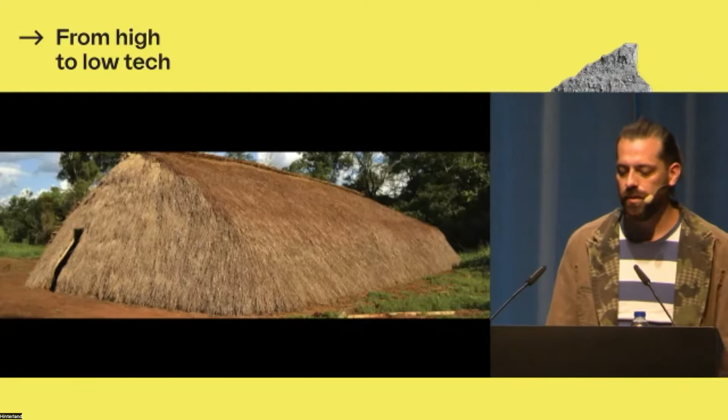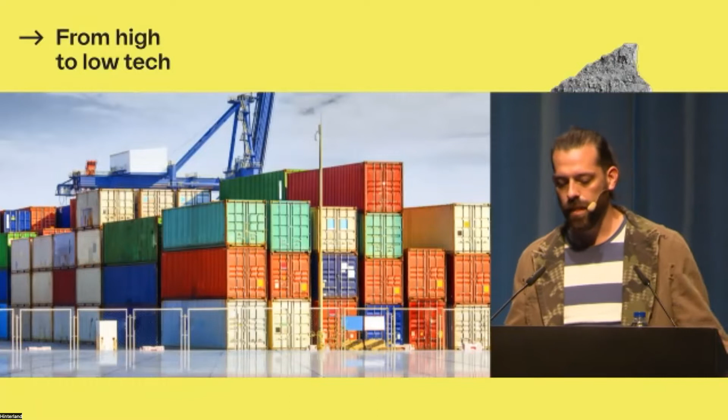This is how they live until now, much more sustainably than all of us. Unfortunately, the Guarani people are discriminated against. People with economic, social, or political power steal their lands and kill them, because over time, society grows, and we all speak new languages, many languages.

But the best thing we did as a society—technology advance, medicine, architecture, engineering—continues to condemn a large part of humanity to live in poverty. In Paraguay, 30% of the population lives in poverty. Poverty means living on $3 per day. And the people without access to housing is 15%. And if they have a house, it is very vulnerable.

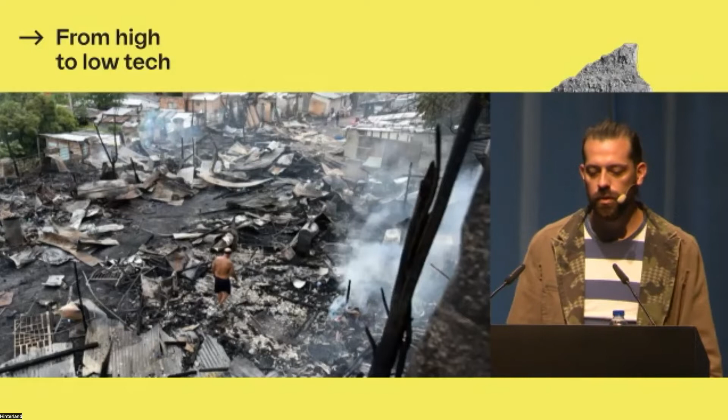This is Chacarita neighborhood, one of the poorest places in Asunción, the capital city of Paraguay. We believe the world is in crisis, but the crisis is the lack of imagination to see a new way of constructing life.

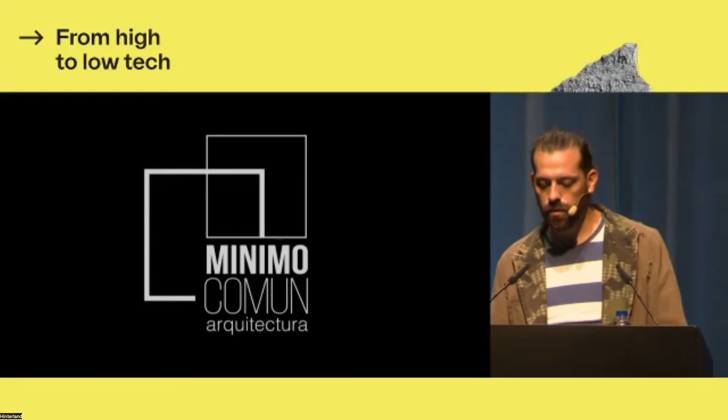At Mínimo Común, we try to imagine new models with resources that we have at hand. And this is our team. It's made up of Solanito Benitez, Veronica Villate, and me, Sergio Merlo. But the people who work with us are more numerous.

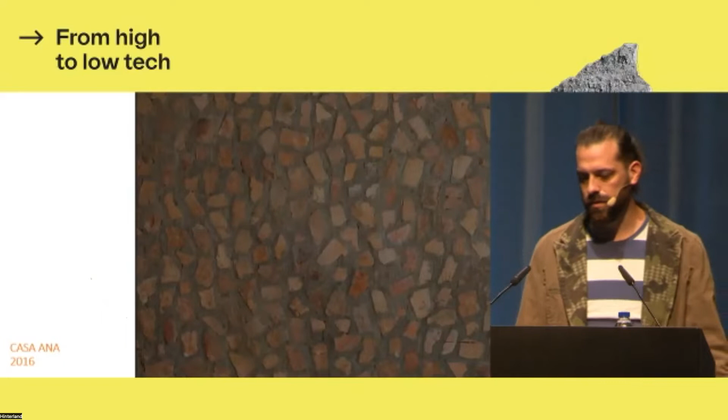In 2016, we had our first job. Our office is young, and it was an old house in a state of collapse. Some pictures of the initial state show humidity, a little fire, and how the house was in a state of collapse.

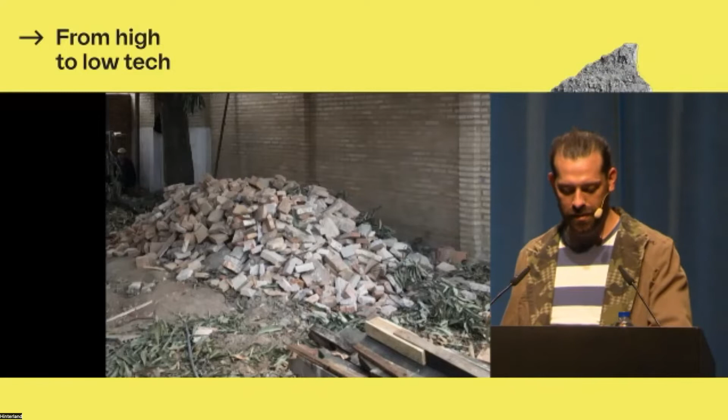We demolished a part of the house. First, we changed the structure because the walls supported the roof. Second, we tore down the walls, and we used the same broken bricks to build the new walls.

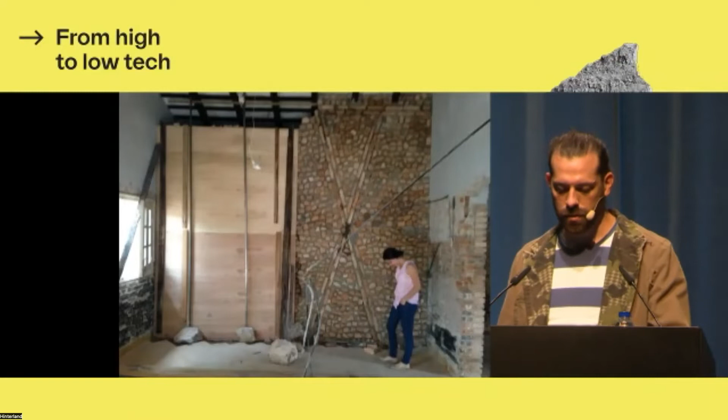We used formwork for construction, and we did not change the roof, we only restructured the house. And this is the result: we gained new textures, new colors, new airs, new lights, new space. We only changed the interior.

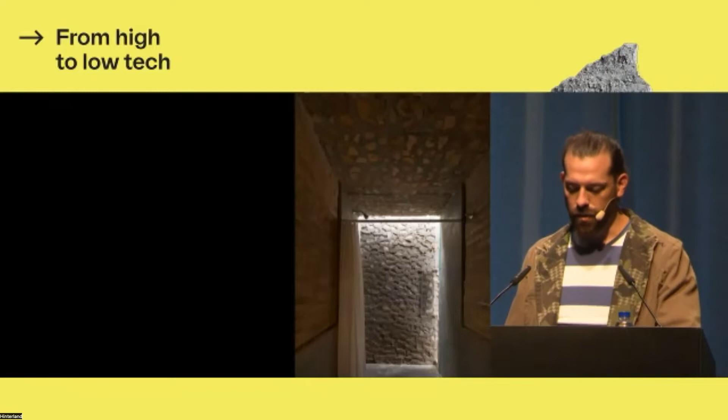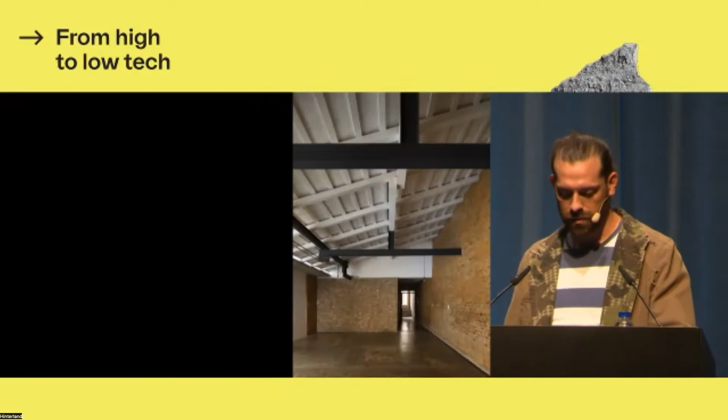This is a contrast. All the windows are now new doors. And the old house became the new material for the new house.

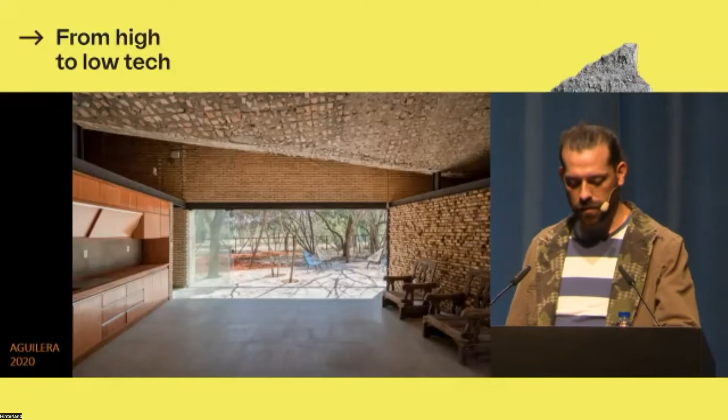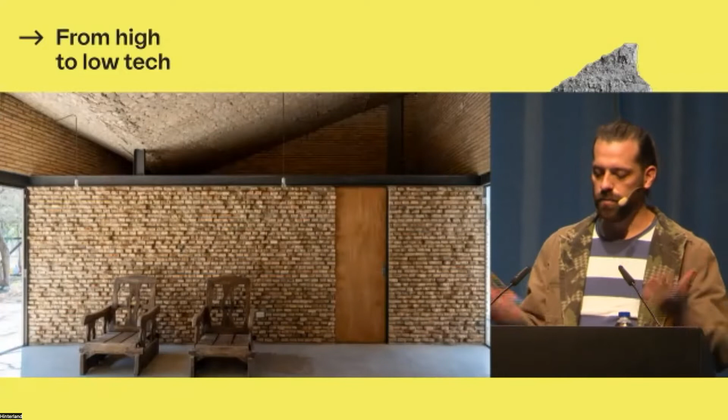This is another example of our work with waste or demolition material. In this case, we made the whole interior with broken bricks from a demolished house. On the site, we had an old collapsed construction, and we used all the broken bricks to build the house. The roof can collect rainwater, and we only bought bricks for the exterior.

In 2017, we had our second project. This time, we didn't have all the bricks to build. But the cheapest material in Paraguay is the common brick. The cost for one brick is 0.05 euros.

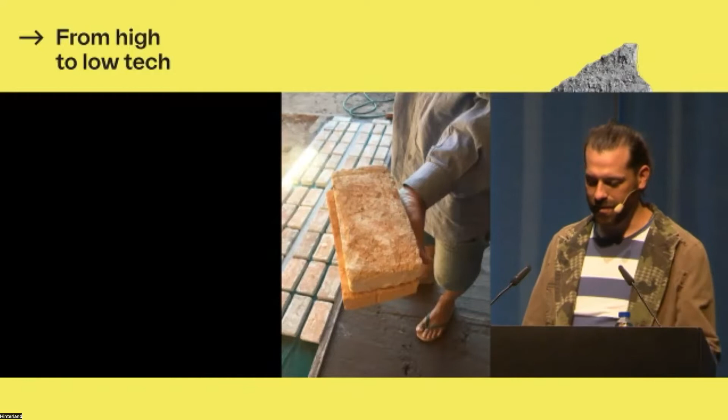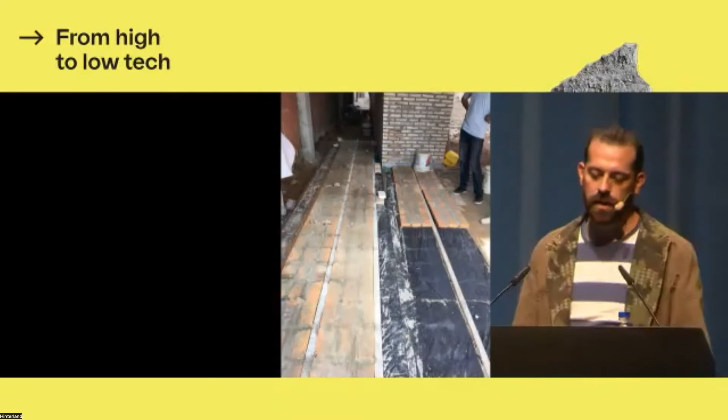No one uses raw brick because people say it is ugly and shabby. Our wish on this occasion is to improve the production and show that the material is only part of the construction. With creativity, we can build good things.

We again use formworks for construction, zigzag formworks, to gain inertia, because the walls are only 4 centimeters.

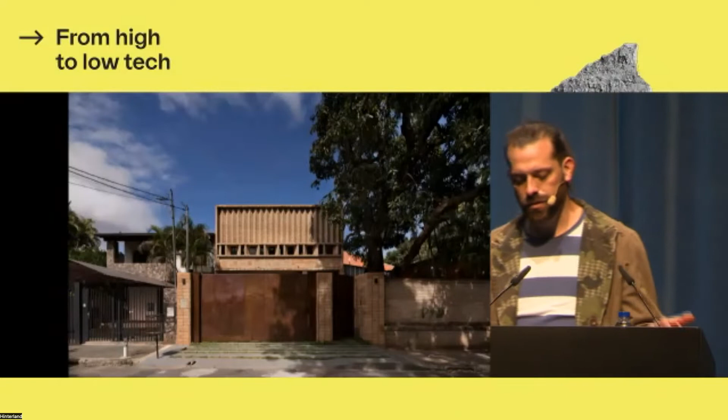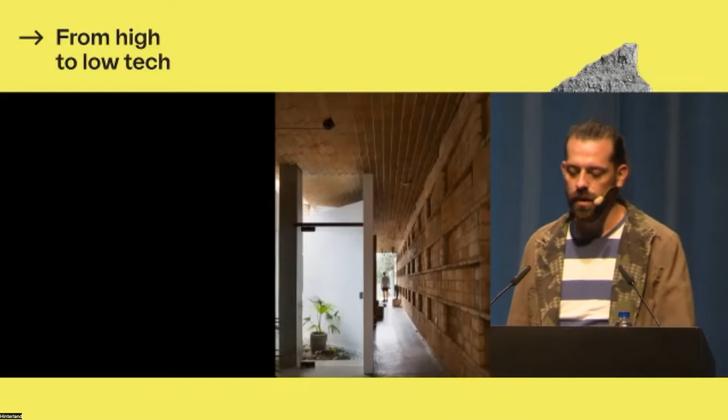In this occasion, we use the common brick for everything: floor, walls, windows, and roof. Maybe it's a little exaggerated, we know, but we reduce the concrete and the price. We always try to introduce vegetation in some places, and paint walls white to reflect the light.

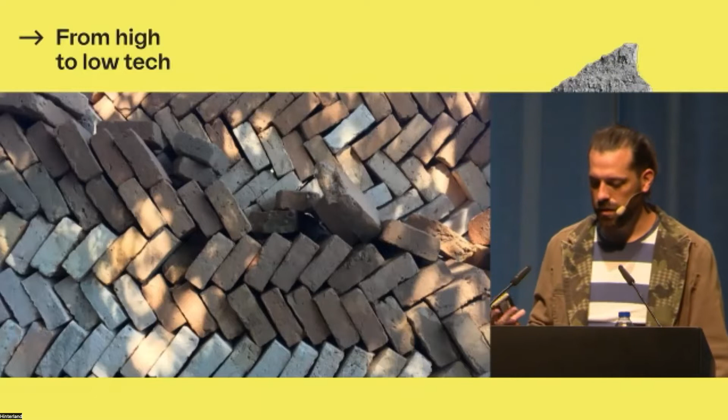When you go to buy bricks in Paraguay, the bricks come in a big truck. The time to unload 20,000 bricks from the truck is only 2 hours, but using the same number of bricks in a build takes 5 or 6 weeks. The question is, how can we build in the same time?

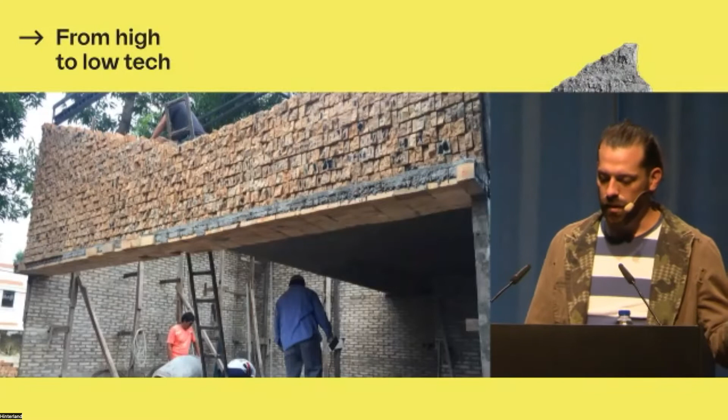This is how the bricks come down from the truck. In this house, we built with the cheaper systems. We didn't start construction thinking about that, but as we started, the owner ran out of money. Some bricks we had already paid for, but now we needed to finish the construction in record time and record price too.

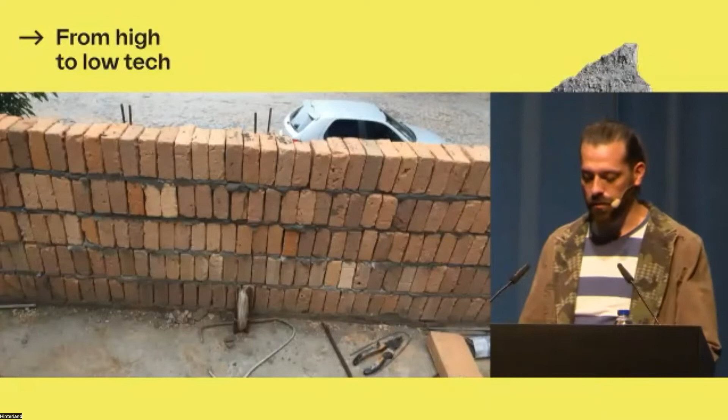We used the same construction system as the ladrillero, the people we buy bricks from. The cost of this house was $10,000, today it would be $8,000. The house has 65 square meters.

The cost for a small flat like the J house in Asunción is $70,000. This is impossible to pay for 90% of people in Paraguay. That's because dirty money from narco-traffic and corruption, combined with real estate speculation, regulates the market.

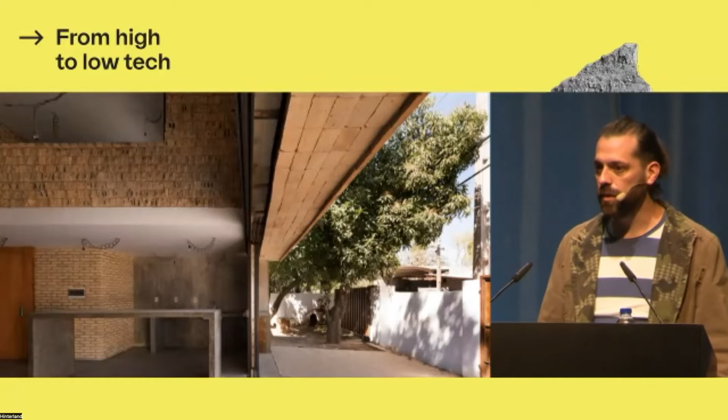We use all material in raw form: oxide metal for doors, concrete for floors and the structure. In this case, we use less concrete, less brick, in less time, and in consequence, less money.

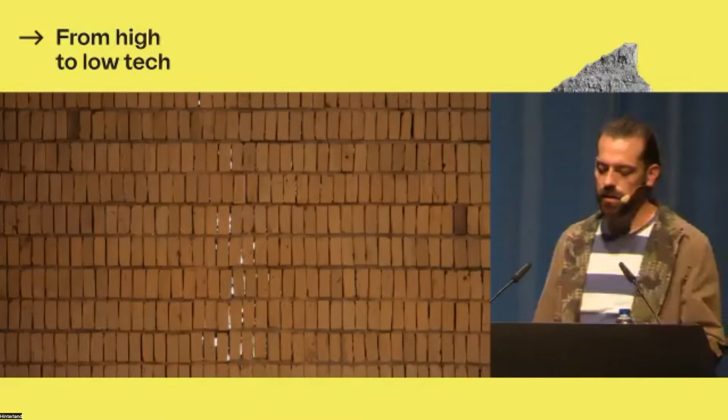Now I want to present a job for the Ibero-American Architecture and Urbanism Biennial. It was in Asunción. We worked with Entre Nos Atelier de Costa Rica, Michael and Ale, two friends.

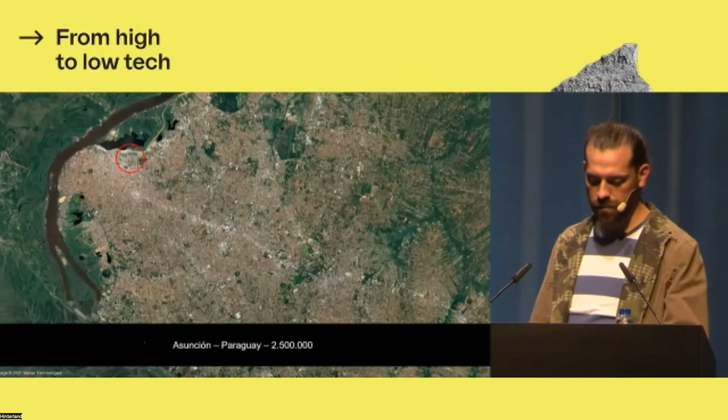This is Greater Asunción, with 2,500,000 people. This is the Chacarita neighborhood. Chacarita has a lot of problems: gentrification, inundation, poverty, but social exclusion and discrimination are the worst.

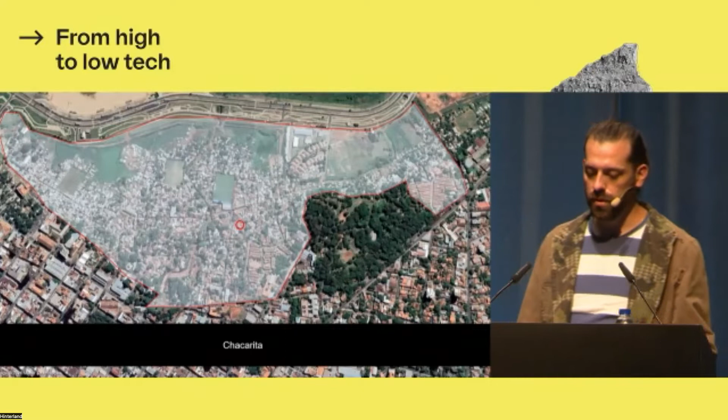We worked in Amapola Square, a site between Resistencia Soccer Stadium and Caballero Park. The location of Amapola Square is strategic for the Chacarita residents, and it's a place to connect the stadium, the park, and the rest of Asunción.

A lot of people use Amapola Square, but no one stays in the square for fear of being robbed.

Amapola is a corridor, a bit bigger than other streets in Chacarita. All of Chacarita is comprised of corridors. When you find a site with sunlight and wind, where you can sit and rest, it becomes a new square.

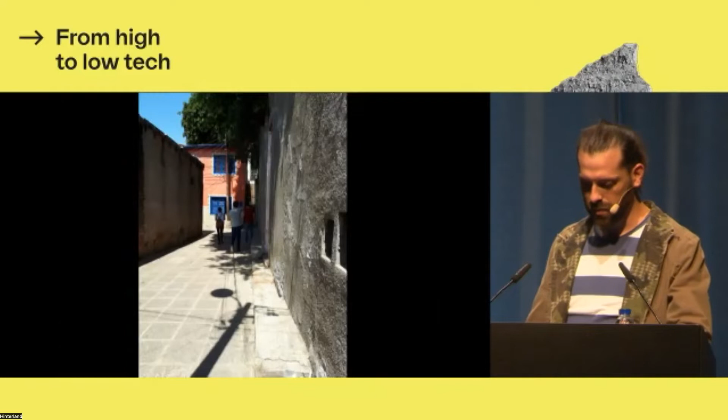Some pictures from the site. You can see the high walls built out of fear. The square has 4 exits, so it's the perfect point to escape the police. People stealing outside the city run into the square and disappear.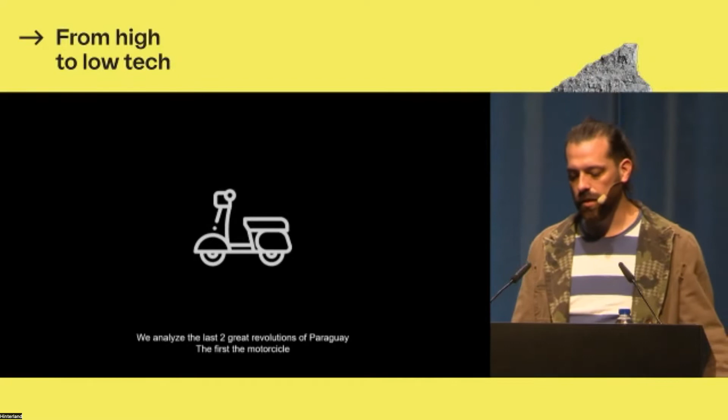Before drawing or thinking anything, we analyzed 2 great new revolutions in Paraguay. The first is the motorcycle. In a country where basic services are a privilege, the motorcycle allows more people to move and access services. It's a problem too, but it's a solution for the catastrophic public transport system.

The second revolution is the internet. Remittances are very important for the Paraguayan economy; more than 1 million people live in other countries and send dollars to their families. In Paraguay, 89% have a smartphone, but only 43% have internet.

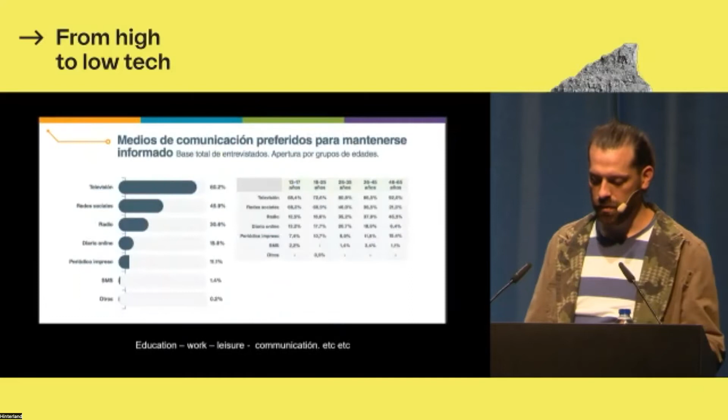In Chacarita, there was no internet because it's very expensive. But everyone needs internet for education, work, and talking with family living in another country. We believe internet must be a universal right.

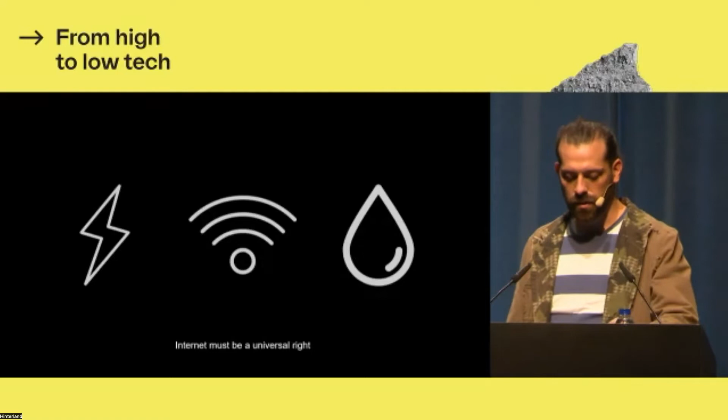But the first thing was to talk to the neighbors, and everyone told us the place was dangerous. We could bring computers, projectors, phones, and gathering together at night seemed crazy, but we did it. This meeting was the first brick in the construction, because we had an excellent meeting until midnight and no one was afraid.

The neighbors believed in the project. For us, it's very important that people use the place, use the square. We need to regain the social control.

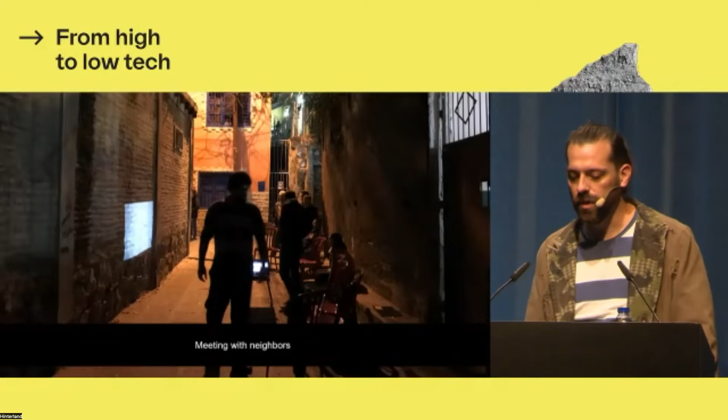We need the neighbors in the street. We need the children to stay in Amapola to do their homework. We need as many people as possible, because the people are the security.

The project was simple: shadow for thermal comfort, benches, and electricity to charge phones or computers. We hate the renders. No.

We explained the project to a mobile phone company to get free internet installation, and luckily, they said yes.

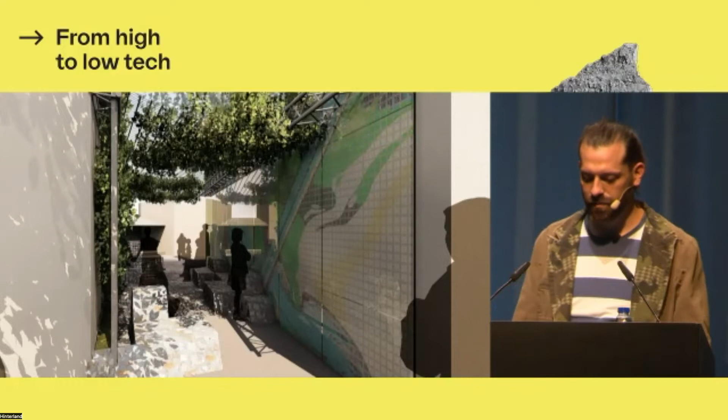And we talked to a famous graffiti artist in Paraguay about a mural. The painting was the idea of the neighbors. They wanted a beautiful painting in the square. But we thought of a new concept of mural, and we converted the painting into pixels with QR codes. Every QR code is a free book ready to download with free internet.

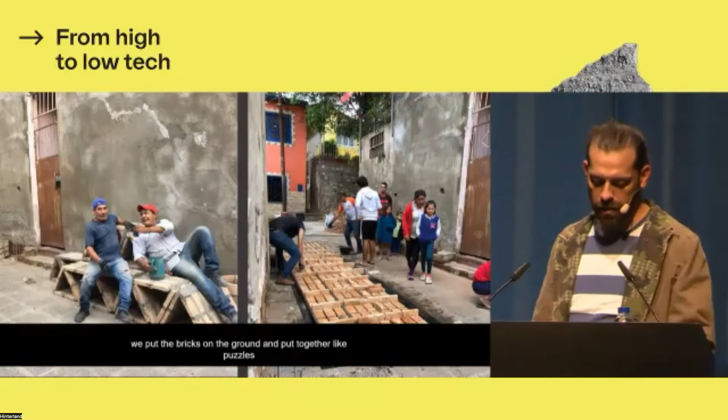We organized work days with neighbors and friends and taught our construction system. We put the bricks on the ground like puzzles. Everyone could help along the way - children, adults, no matter. It was funny, it was like playing.

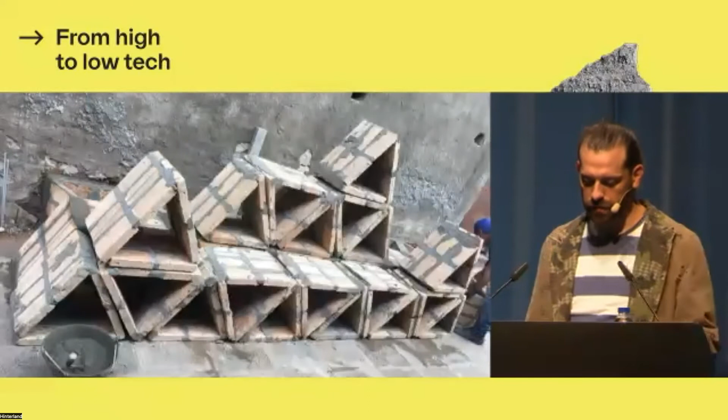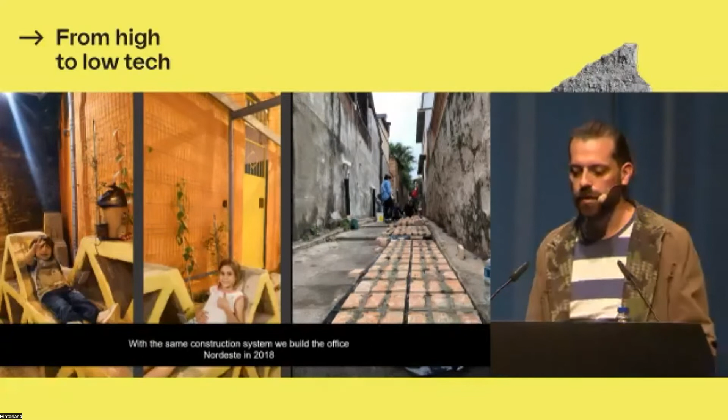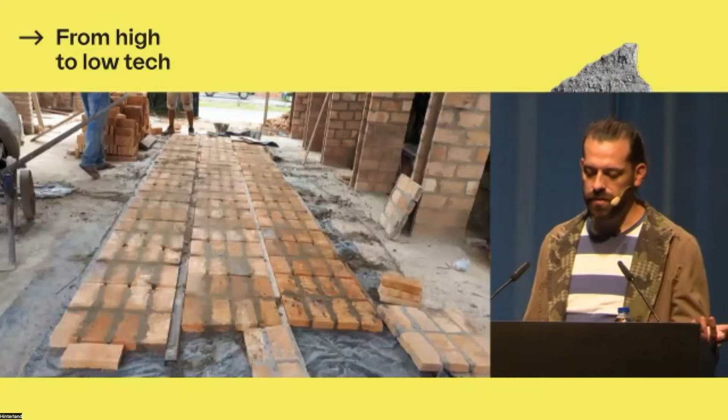A year before, we built the Nordeste office in the same way. For us, it's important because we use the same knowledge for all people, no matter if they have money or not. And if we can build Nordeste office, they can build too. Nordeste is an experiment with bricks. We repeat the system - we put the bricks on the floor and put them together later.

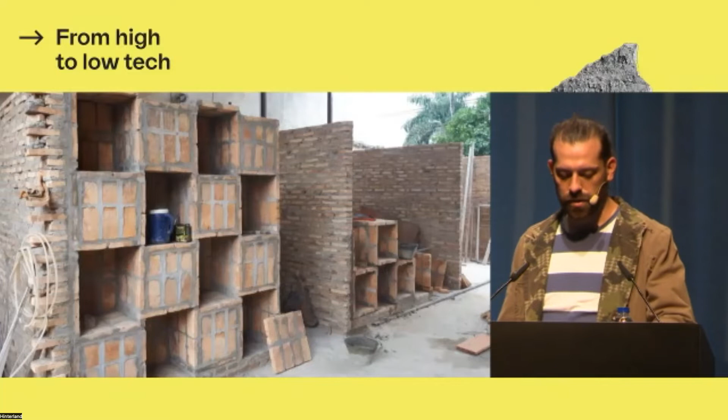We use this system a lot because it's easy. Anyone can do it - no need for special workers or technology. It's only putting them on the floor and later putting them together again. We mix the structure with the bricks and generate the office.

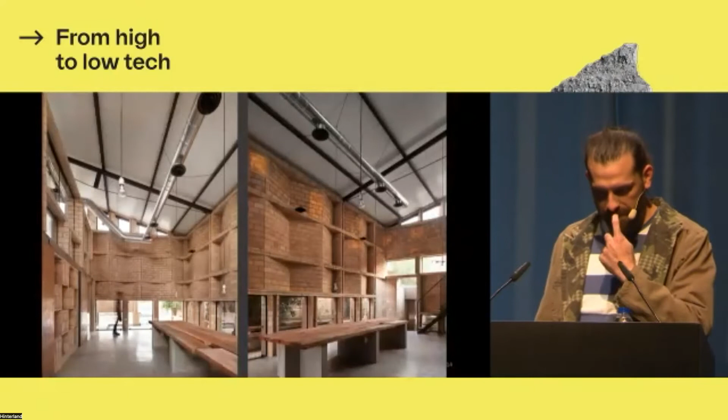We leave the unique tree in the plot inside the office. The walls are 4 centimeters thick, and involved, all the office like a house of cards.

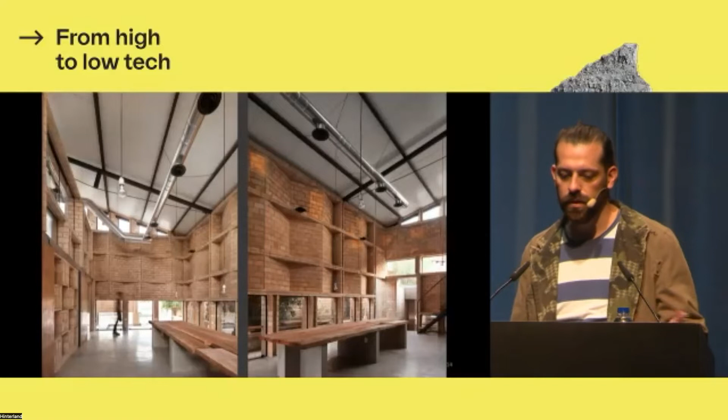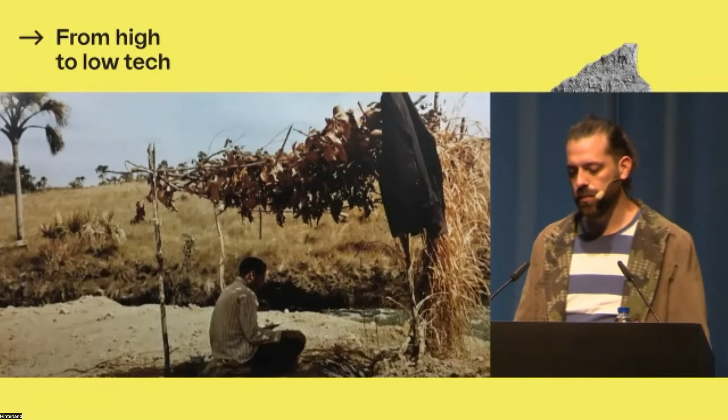In 2019, we changed everything we did in the last 4 years and started a new vision of our architecture. This image is from the Triple Alliance War - in 1865, Paraguay was at war against Argentina, Brazil, and Uruguay. But I want to show the architecture. They used two roofs, one to shade the second roof and one to close the space. Again, the shade, the shadow. The shade was the most important thing to survive the extremely hot weather.

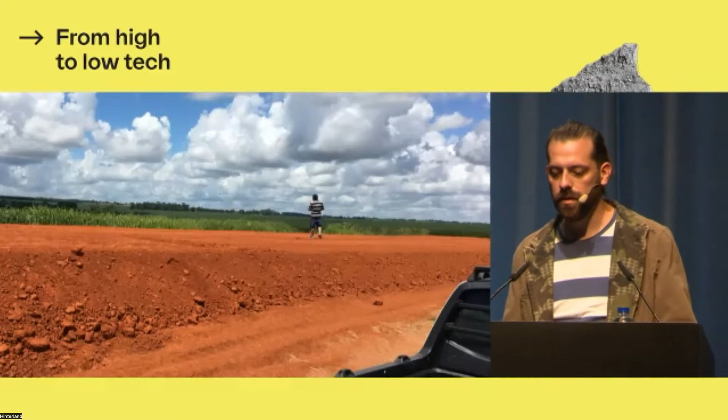At this time, we needed to build in the middle of nowhere. Curuguaty is a city 300 kilometers from Asunción. The economy depends on agriculture. We can see the green sea - no trees, no animals, only soy.

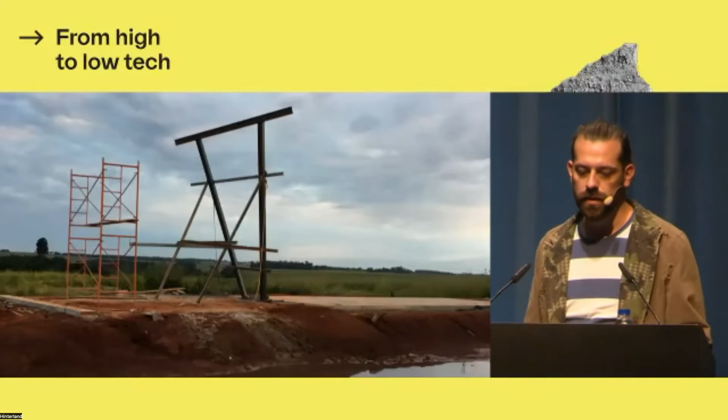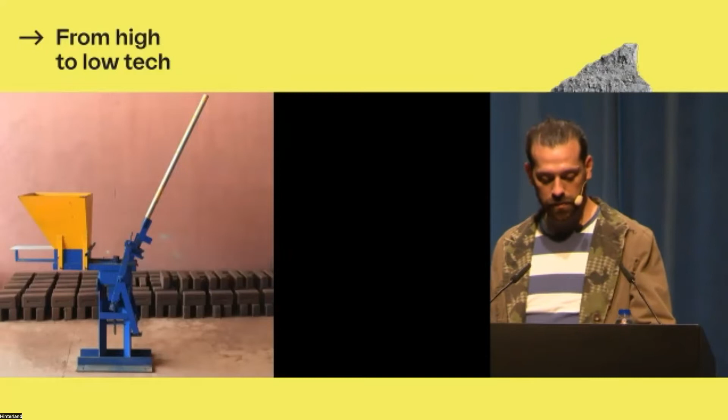For the hot weather, the first thing we built was the roof. We can only bring materials that cannot be broken because the road is complicated and long. We bought a duck - this duck is special because it eats earth and poops bricks, a lot of bricks. At the same time, we did the roof and the earth bricks.

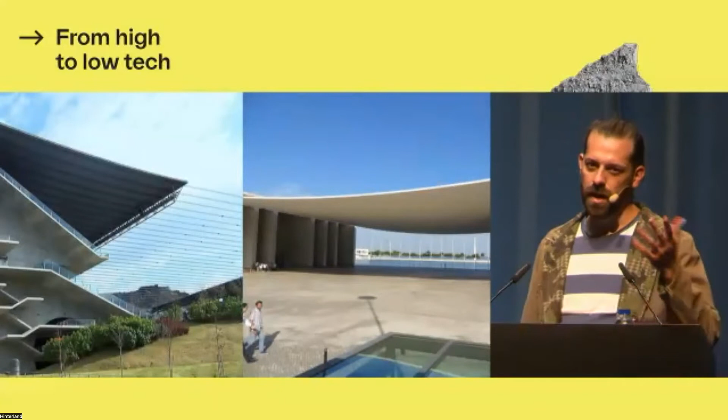For the roof, we used a density of steel ropes to span the 45-meter distance, but at very, very, very low cost. We took advantage of the catenary. The rainwater is collected, allowing it to be reused.

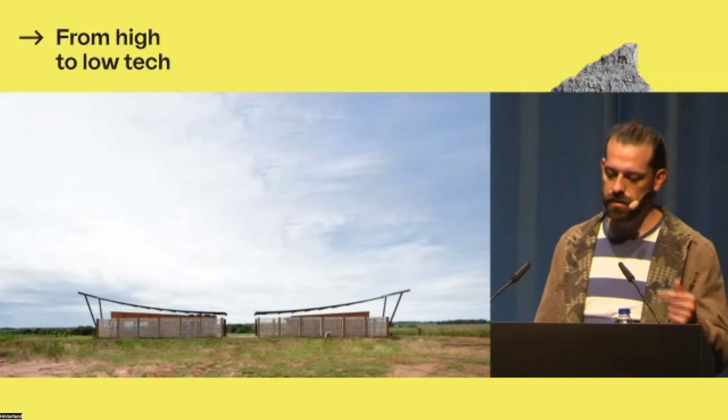All this earth. And for the exterior, we built a parasol of earth bricks too, but this time without cement. We used a little bit of cement in the other bricks, but in this case, completely without cement, because we will erase the bricks with water, leaving only the lines of mortar - because that was going to happen over time with the rain anyway.

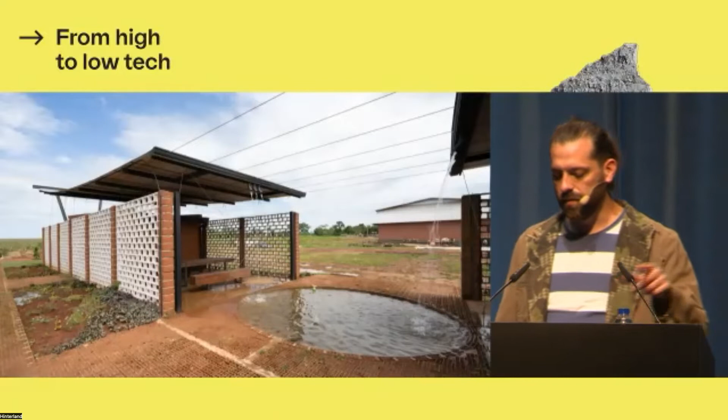We made a homemade refrigeration system. The water is pumped to the highest point of the roof, falls again, distributes over all the roof, and generates a circuit. The circuit generates a microclimate - it's cool and can generate humidity.

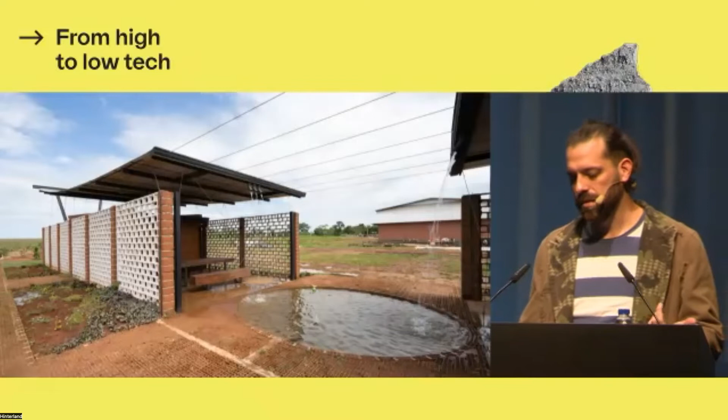Pictures. We expect the plants to aid the building. It's a line in the landscape.

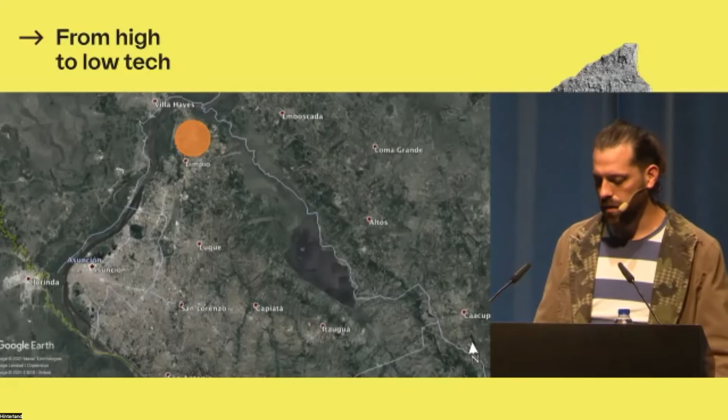In 2019, again, a friend called us because she needed help with a community in Limpio City. She was part of the NGO Techo para mi país. This NGO builds houses for people with limited resources, but this time the community wanted to build a little chapel. Limpio is near Asunción, about 1 hour away, and 1,000 people live in the community San Cayetano.

And there is where we designed the chapel. The project was not ambitious - a couple of walls and a simple roof - because we had conditions for construction.

The first condition: we had no money. The second: the people of the community must build it. The third: the people could only build on Sundays. And we had more conditions, but this was the most important.

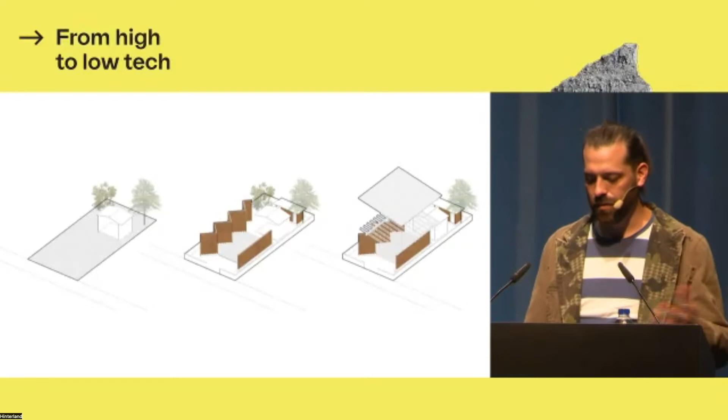At this point is when we said, what the fuck, OMG. And we started an investigation into self-construction or vernacular systems. We experimented with rammed earth, but the reality is that the rammed earth system is very slow for us, and if they only build on Sundays, they would never finish. For more speed, we could buy electric pistons, special formworks, earth sieves, and many other tools, but we had no money.

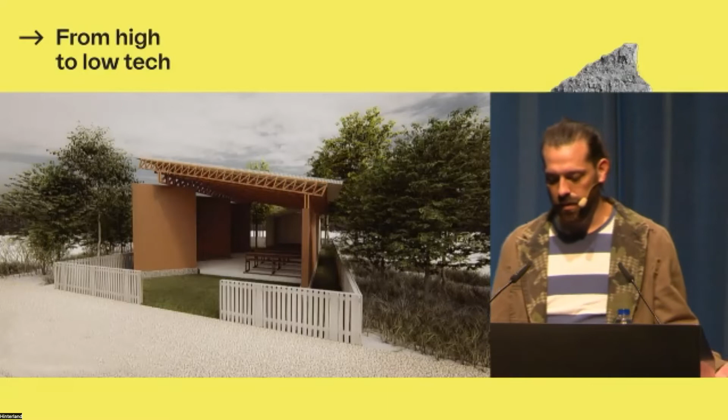We began to think it is not possible for architecture, or for alternative architecture, to be only for people with money. We had the earth for material, we had workers, we had architects, but we could not build.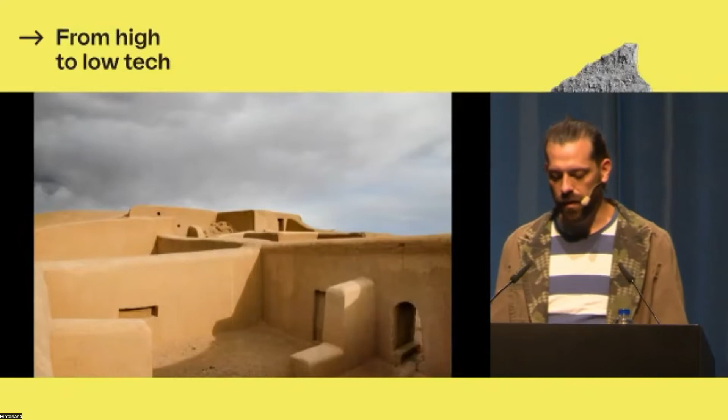Until we tried rammed earth. This technique has existed for many years, but in Paraguay we never saw it used. This is in Mexico, the first registered construction with rammed earth. It's used elsewhere too; in France they have an industry for it. But we started small, with just 1 square meter.

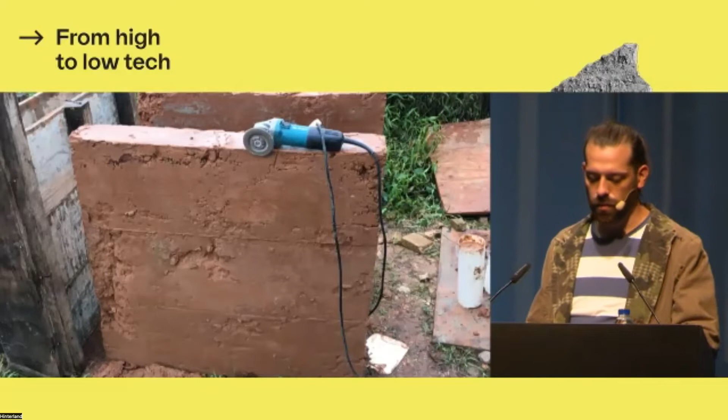We used formworks, fabricated with other woods. We did resistance tests because we didn't know anything, but the results were very good. The resistance is like common bricks, and with bricks, we are experts.

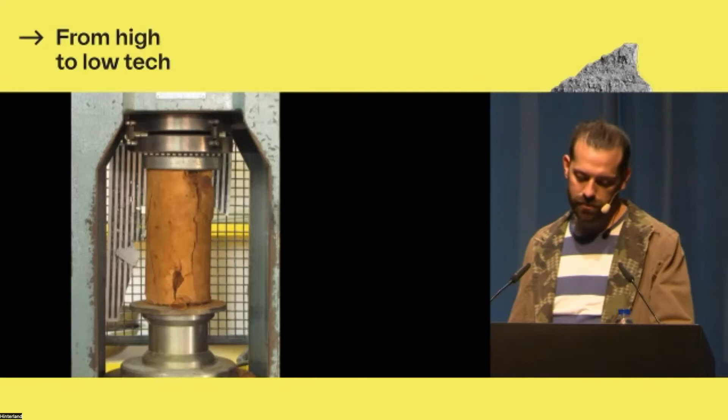We did bigger modules, and when we were ready to start the first build with rammed earth, for legal problems with the land, the chapel was cancelled. But the good news was some friends were ready to build their house with the same material.

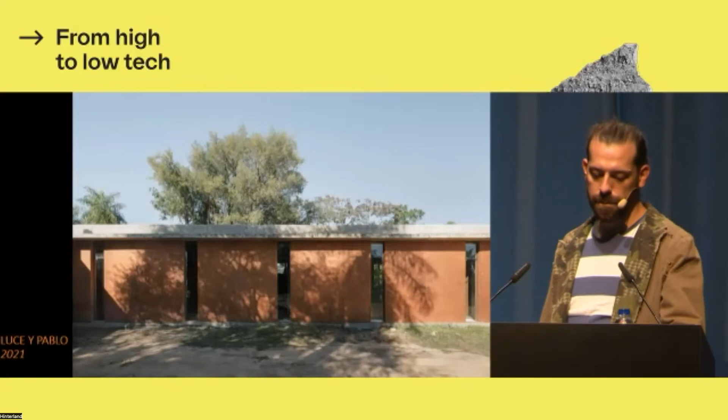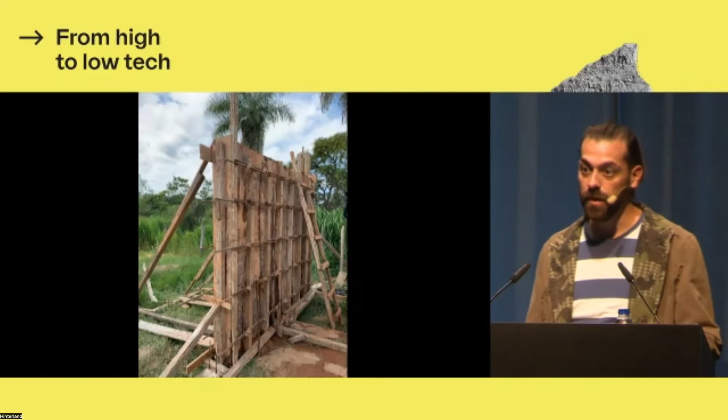In 2021, Luce y Pablo House was born. We modulated our house based on commercial woods, and at that moment we had a little bit of money. With the formwork, workers are much faster. We used a simple mixer, and then charged the formworks.

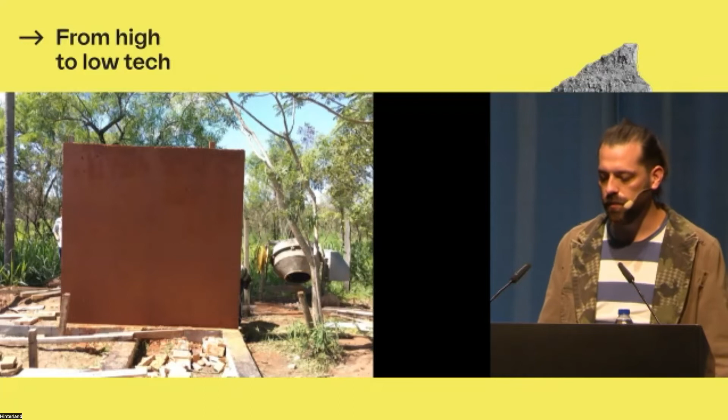Only 1 day after we remove the formworks, we have a rammed earth wall. We can do 7 square meters per day with small teams. We built the walls with 15 centimeters thickness.

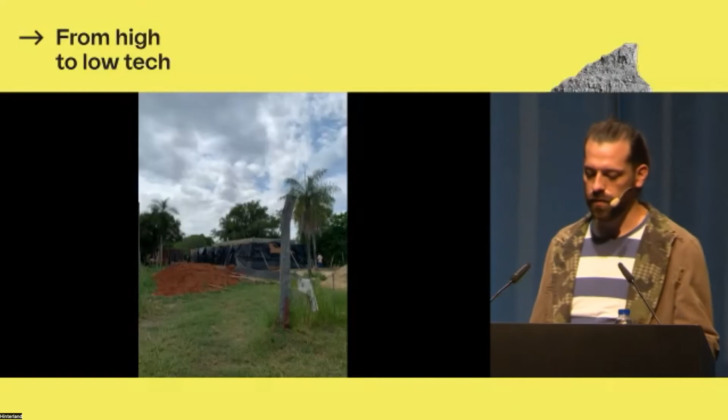Covering the walls is very important. For earth construction, you only need 2 items: good shoes and a good hat, because rain and water are the enemy.

We built a roof garden, and the windows are just the space between the walls, no more.

Some vegetation to renew the air. We said living in this house is like living in a cave. It's cool, it's cozy, and it smells like freshly watered grass.

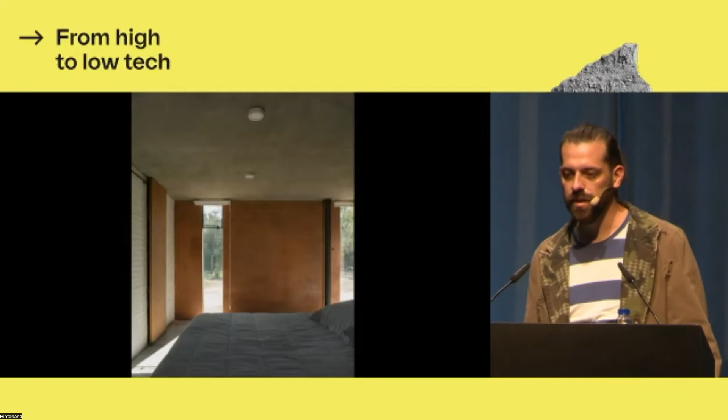It is our first experience with rammed earth, but we know this is not the limit. There are infinite possibilities to explore. The best is yet to come: the chapel started 2 months ago and is going very well. We can confirm the material system is ready for self-construction, it's fast, and it's cheaper than traditional builds. It's just changing the earth from solid to liquid to solid again.

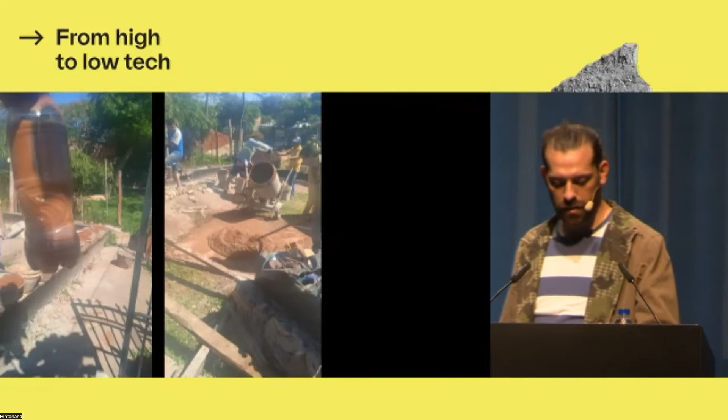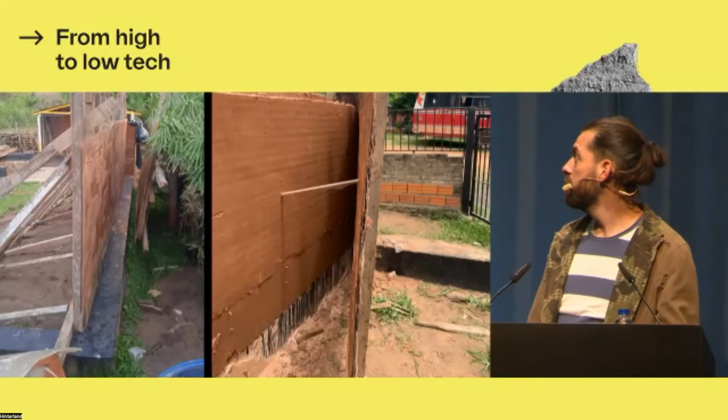It works through community, through hard work, everything. And for now, it works. Soon we are going to have the second construction with rammed earth in Paraguay, but this time it will be built by its own users. Thank you.